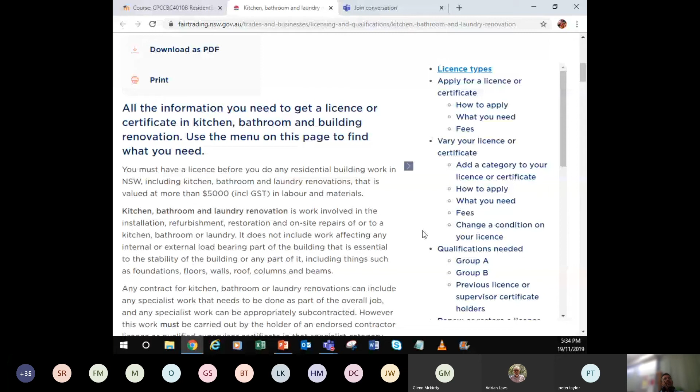I'll quickly read some parts of it, and then I'll show you where you can get your licensing. I think it's like 8 subjects from the Cert 4 if you wanted to. It's not going to matter for you boys and girls because you have all of those quals. But I just want to quickly touch on this before we get into the wet areas. So to get a license or certificate in kitchen, bathroom and building reno, you need to complete a few subjects. Sorry, this screen's just getting hard, getting used to.

It's work involved in the installation, refurbishment, restoration and on-site repairs of or to a kitchen, bathroom or laundry. It does not include work affecting any internal or external load-bearing parts of the building that is essential to the stability of the building or any part of it. That includes your foundations, floors, walls, roof beams, and columns. So really, it's non-structural licensing work to do your bathroom renovation. A lot of wall tilers do it, some plumbers do it - they get their renovation license.

For you guys, you're going to have your Cert 4 complete, so you could get this, but you'll be able to get your builder's license, which you could do the whole lot. Okay?

The licensing types are the same as all categories of licensing - plumbing, building, carpentry. You can get your qualified supervisor certificate, and you can also get your contractor license, or an endorsed contractor license. We've gone through that before, so if you want to go back, have a read up yourself. But that's for every category, okay?

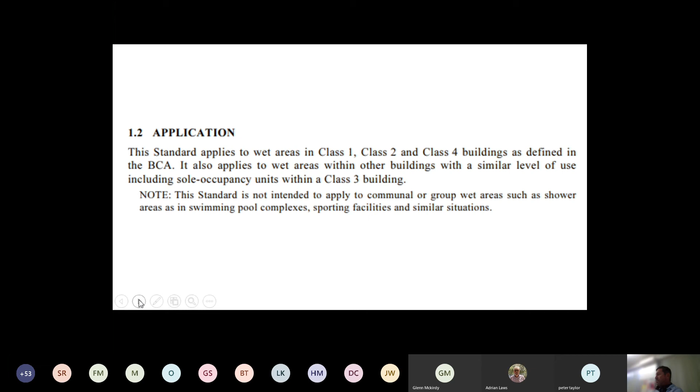I think it's SOUs, which is just like a single unit where someone lives, sole occupancy, like the same for class 2s. Yeah, like a little apartment. All right, I'll move on.

If you go into the definitions, boys listen up, just go into the definitions and look through all of them, but I've highlighted the ones that I think are quite relevant, or maybe harder to understand.

So bond breaker, does everyone understand a bond breaker? I've got some pictures I'll show you in a moment. It's a system that prevents the membrane bonding to the substrate bedding or lining. They have them in the corners. I'll show you a picture in a moment.

Maximum retained water level, has anyone ever heard of that term? The point at which surface water will start to overflow out of the shower. So you got your hob at a certain height, so the maximum retained water level is going to be, say, 100 mil. So your maximum retained water level that doesn't have a hob is only going to be 10 mil or something. So you have to make sure it runs away pretty quickly in comparison to a hob.

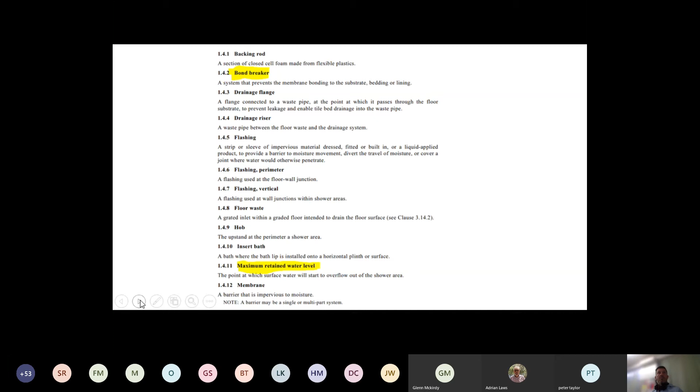There's a few other definitions there. Most of them you should know. You know what a shower screen is, shower tray. I think if anything, maybe the bottom one - do we all understand the difference between a shower area that's enclosed and unenclosed? I'm assuming you guys know that. I'm going to move on.

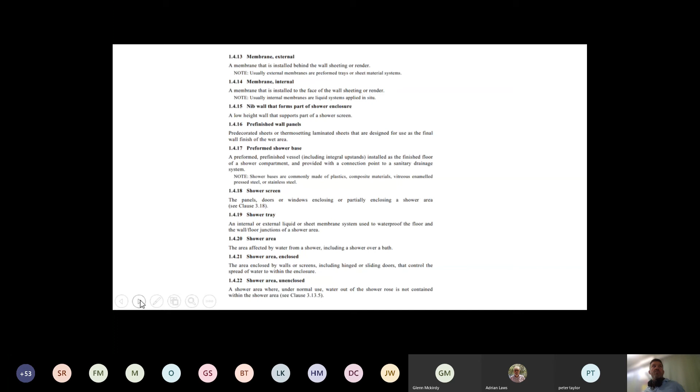Waterproofing, or WP, the property of a material that does not allow - there's water resistant and waterproof, you have to remember that, it's pretty important. So waterproofing is the property of a material that does not allow moisture to penetrate through it when tested in accordance with AS 4858. That's one of the other standards that talks about the materials. We don't need to go into it, but just remember, waterproofing does not allow moisture to penetrate through it.

Because the next one was water resistant, I'll talk about that in a moment. I'll just go back. For the purposes of the standard, the following materials used in waterproofing systems are deemed to be waterproof: stainless steel, copper, flexible waterproof sheet flooring materials, and any membrane that meets the AS 4858 standard. Most of the products you're going to buy are going to say that it meets the requirements of AS 4858.

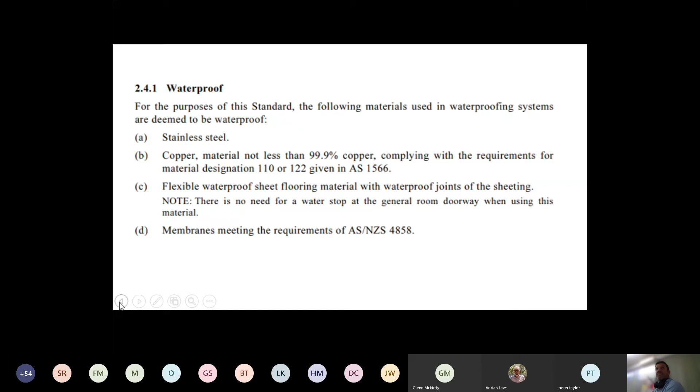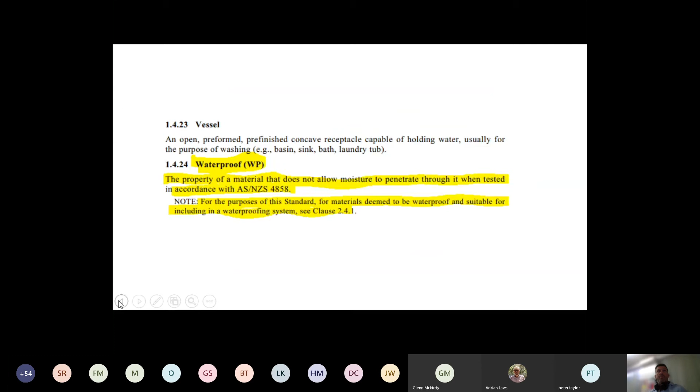So I'll go to the water resistant part first. We said how waterproofing - let me just go back - waterproofing does not allow moisture to penetrate, but water resistant is the property of a system or material that restricts moisture movement and will not degrade under conditions. So it's not going to stop it, but it restricts it. Guys, give me a bit, it's hard for me to do it and talk.

Does that make sense? A waterproofing system is a combination of elements that are required to achieve a waterproof barrier as required by the standard. So that's the whole lot - that includes the substrate. Does anyone know, you guys know what a substrate is? Can someone in the chat box tell me what a substrate is? Membrane, bond breakers, sealants, and finishes. Does anyone know the term substrate?

Can someone in the chat box? Yeah, so Josh is right - it's the material you're working on. So it could be concrete, it could be FC sheet, it could be particle board flooring. So some of those substrates would be water resistant, some might not be. And that determines to what degree you're going to start waterproofing the system or the wet area. Yeah, that's right, Riley.

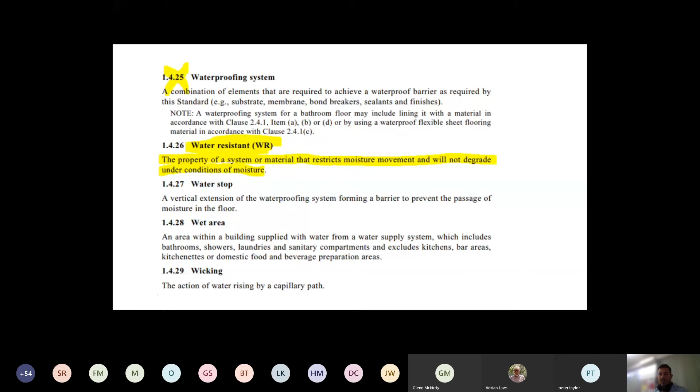I won't go into this in full depth, but water-resistant substrates for walls can include your concrete, cement render, fibre cement, water-resistant plasterboard as per that standard, any masonry. Your floors can include concrete, compressed fibre, fibre cement sheeting, flooring grade particle board sheeting in accordance with those standards, and same with structural plywood in accordance with any of those standards.

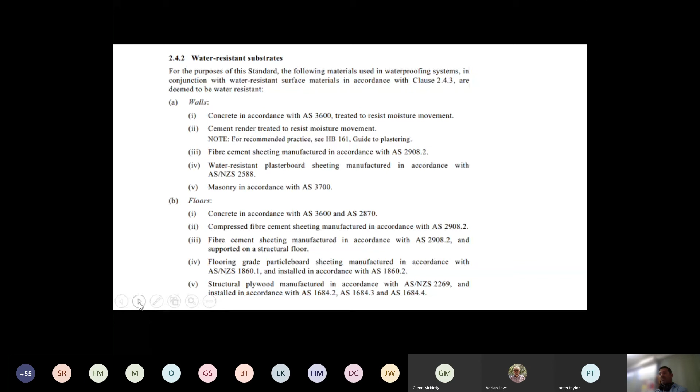Imagine if you get some crappy particle board sheeting that you think's compliant and it's actually not. How do you know? Who's checked? Have you ever checked? You don't check that much, eh? Oh, very rarely. Yeah, so it's all on the builder. Anyway, just be mindful of that.

Righto, so design and installation - waterproofing systems and their installation details shall be waterproof or water resistant as per the code. While I'm going through this, can you go to your NCC, open that up now, and just open up volume 2, and I think it's section 3. I want you to have a look because I'm going to open mine up as well.

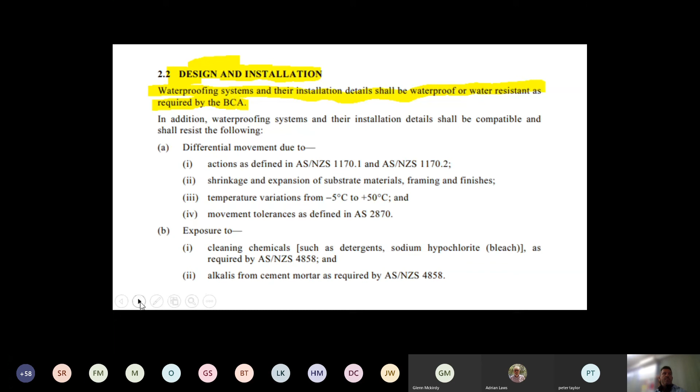All right, so you've got a snapshot, that helps.

Okay, so remember acceptable construction - this is the old-fashioned way of doing it. If you just do it the standard method, you will comply. Table 3.8.1.1, I'm going to put that up in a moment - that's in the Australian standard. We need to make sure building elements in wet areas within a building must be waterproof in accordance with that table and comply with AS 3740.

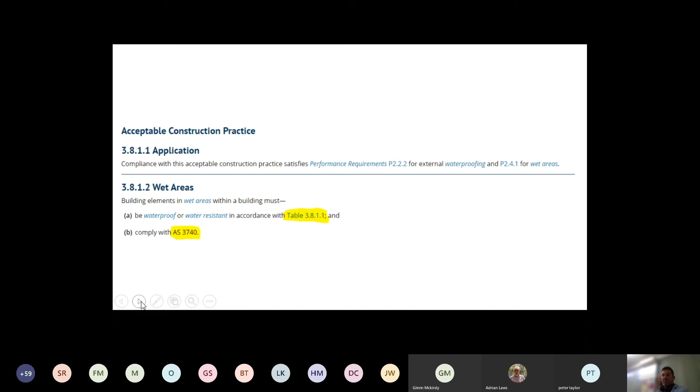I'll put that up later at the end of the night. For those searching, go to part 3.8, health and amenity. Remember the main part of the building codes - don't do 2016, that's the wrong one. Remember section 3, acceptable construction, that's 3 years old.

Does anyone know the falls required in wet areas? Anyone know the falls? 1 to 100. How much is that over a metre? 10 mil over a metre? Sounds good to me. We're required, so let's just think about this.

Falls in floor finishes shall allow all surface water to drain without ponding, except for residual water remaining due to surface tension. Can someone in the chat box or you guys here tell me what residual water means? What's residual water?

Yeah, it's like, that's right - it's like the water left over. So you've got enough fall. Oh, they're high-fiving - Griffith boys have just given themselves a high five. I love it. Look out, we've got some high fives going on here.

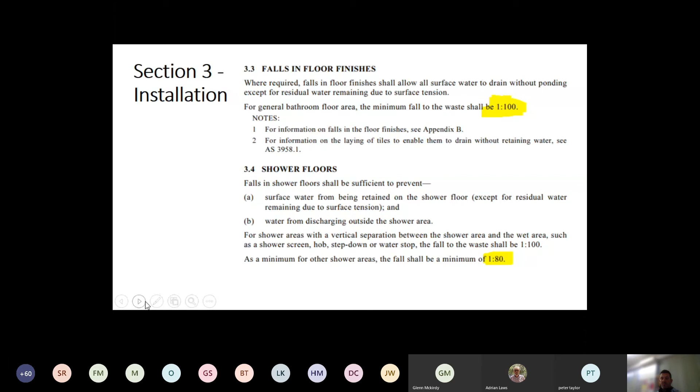12 and a half, I'm pretty sure it's 12 and a half. Tim, you're all over it. All right, you will never forget that. Good work. Make sure you say to your bosses, where's AS 3740?

All right, a couple of other definitions before I get a wriggle on - baths to be recessed into a wall. Did you guys do bathroom as a subject? That's actually a good subject. We don't do it at Wollongong. Has anyone else done it? Any other campuses?

They did it with Bruno here. It's actually a pretty good subject. What you have is, Wagga does it.

That's good. What they do is an integral vertical upstand lip, so it's recessed into a wall along the side of the bath walls to enable a waterproof junction between the bath and the walls. But you can also have baths with a downturn lip.

The downturn lip shall be installed as an insert, as shown in a couple of snapshots to show you.

That's permitted as per the standard, but then you can also do typical bath joints here. So there's more than one way to do it.

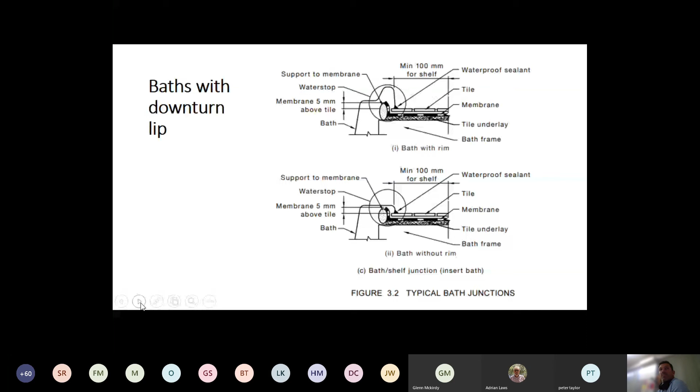I know this is getting pretty fancy, a lot of soap holders. Has anyone noticed that you need to have a fall in the base of the soap holder? It can't be flat, just a slight fall so it doesn't pond. If it ponds, it's actually non-compliant. They can make you rip it out.

Little things like that, as a builder, if there's a mistake and it ponds, you have to come back and fix it. And how much of a punishment is that? Do you know how hard it is? Technically, if you just pull out one tile, that affects the whole membrane, doesn't it? So really the whole thing has to come out, you have to redo it. So be very mindful of that.

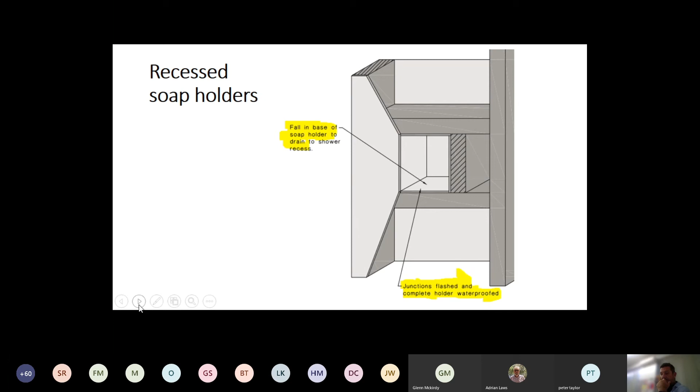I've just taken a snapshot of a typical hobless construction. Some of the shower screen extrusions may not permit the water stop from extending into a rebate, so they've got a channel section that may be needed.

To be installed over the water stop angle in the shower screen, placed on top of the channel. You can see where the floor substrate is, then you've got your membrane, and you've got your angle where the shower screen is, right over the centre.

So what's that, 5mm minimum, it says.

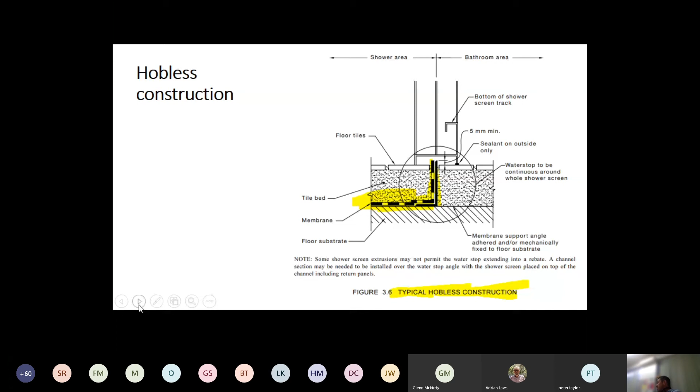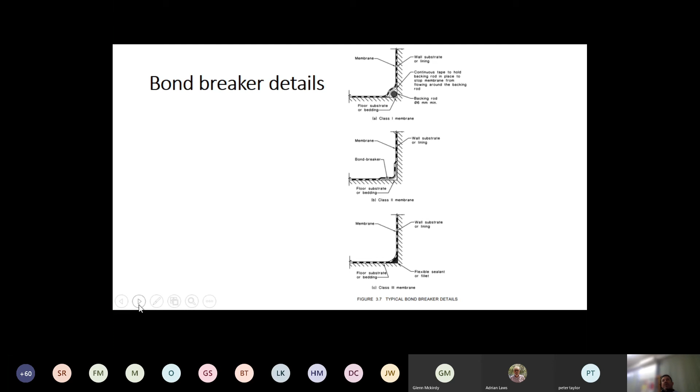Some details of the bond breakers or different types. In the corners there, you can have your flexible sealant or a floor substrate with some membrane, or then you can have the backing rod, that 6mm backing rod. You've seen those?

If you've got the standard open, go to Appendix C, and it's referring to the National Construction Code. They still refer to it as the BCA, but some of those figures, C1 and C4, show it in a bit more depth. A lot of the areas are taken as like 1500mm from the shower connection as an angle where you have to have the waterproofing.

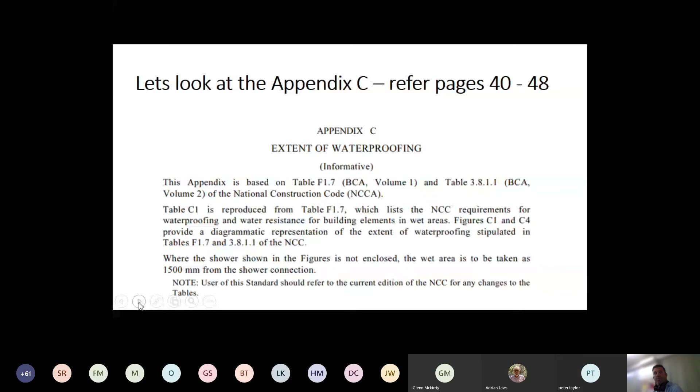Table C1 pretty much is what you'll refer to all the time, whether you need waterproofing or not.

I've got quite a few questions in the quiz. For example, waterproofing requirements with a pre-formed shower base are not applicable for the floors and horizontal surfaces because it's pre-formed.

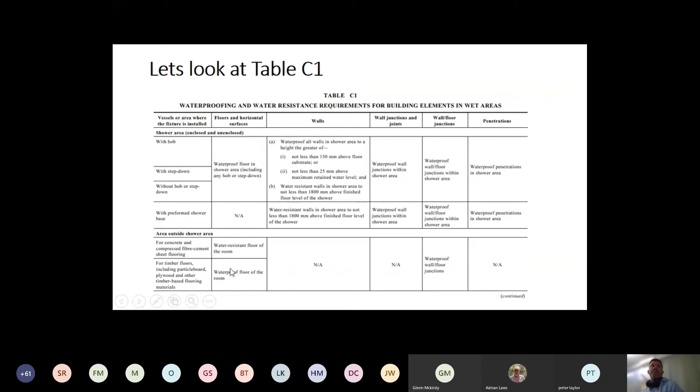For concrete and compressed fibre cement sheet flooring, the area adjacent to the bath needs to have, for the floors and horizontal surfaces, some water resistant floor of the room. Laundries and WCs, water resistant floor of the room. Waterproof the junctions, the wall floor junctions.

Sometimes I've quite often seen builders go over and above what the standard calls for, and I'd probably still stick to that.

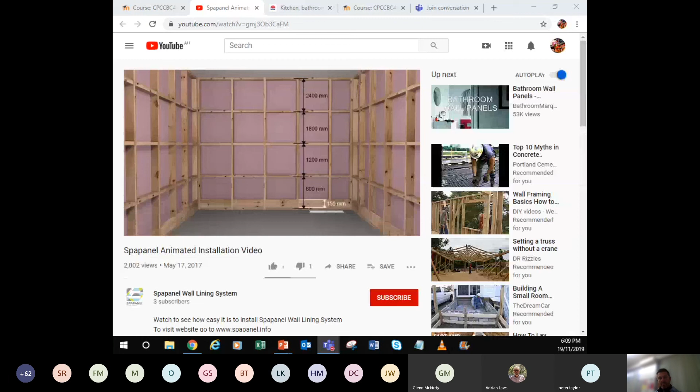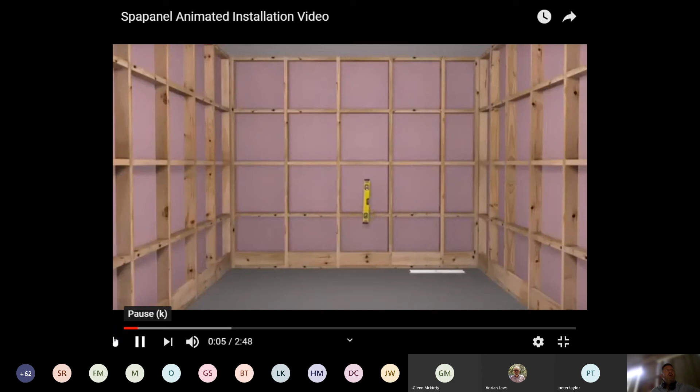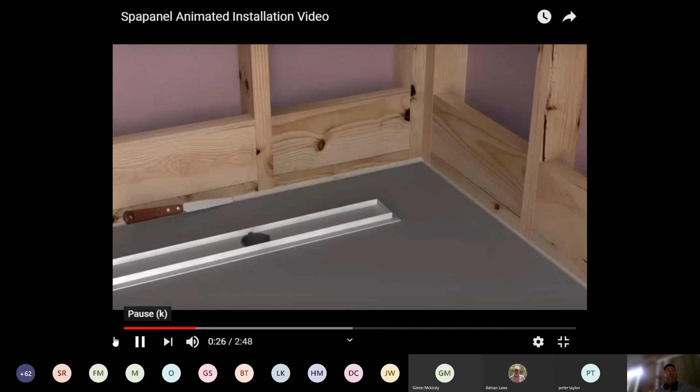Watch this one, guys. This is different, eh? Heaps different, this one. Yeah, it's different, eh?

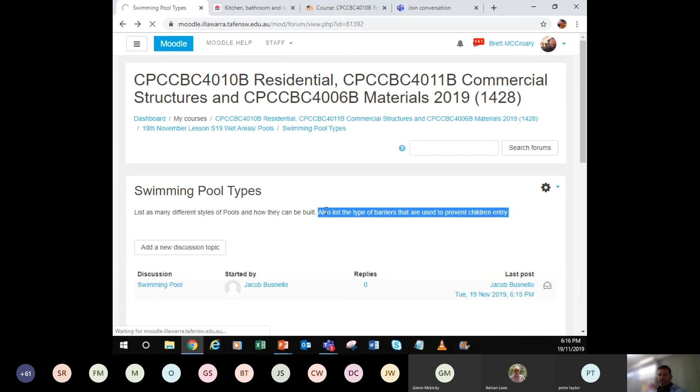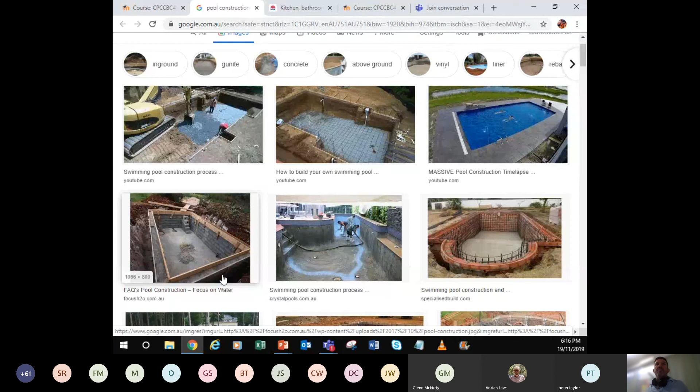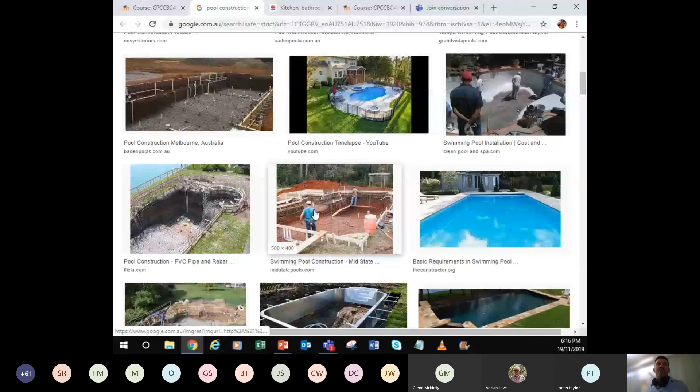What I am going to do is touch on the actual building of swimming pools. I've got types of pool construction: fiberglass, blockwork with a slab, and shotcrete. This is probably the most common and most effective. The fiberglass ones - once you get your builder's license, you'll be qualified to do a pool.

I've got the link here for the licensing. Swimming pool building refers to all work involved in the construction, renovation, alteration, repair, extension, maintenance, decorative or protective treatment of a swimming pool. It includes all other work directly associated with the swimming pool installation, such as landscaping, safety fencing, pool water filtration and heating. Any other work not directly associated with the correct and safe installation and functioning of a swimming pool is excluded.

I saw that there was a qualification you had to get, a cert for swimming pool building, but I'd never even come across that until today, I only just noticed it. But as I said before, with a builder's license you're qualified to do a swimming pool yourself. Licensing are all the same. Just going to open up this next link.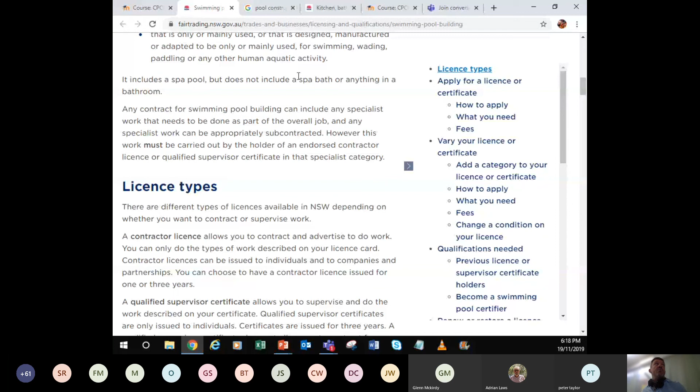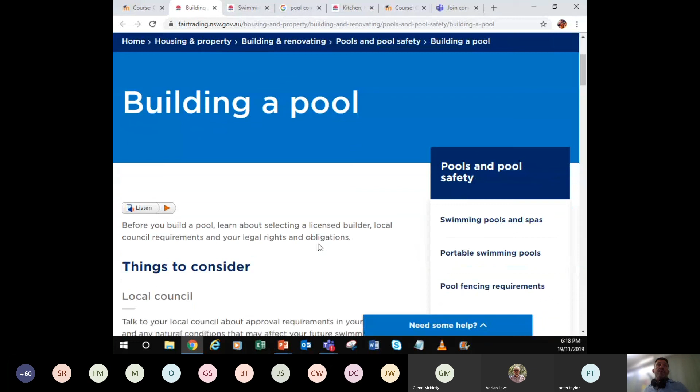I hope you already know most of this. You need to go to your council for approval. You need to get a geotech survey. You need to check for underground cables and anything that needs to go in. Site considerations - your sewers, stormwater drainage systems, and any other utility pipes. Select the appropriate pool for the site, consider maintenance and the right equipment. Approvals, you need some signage during construction, and obviously choosing the right builder - so that's you guys.

Now, we don't go into pool building too much because that's a bit of a specialist trade. But has anyone dealt with swimming pool barriers? Has anyone built a swimming pool barrier? Has anyone had a non-compliance certificate received? Those online, I'm just checking out the guys here at Griffith. Anyone?

Yeah, to swap all the windows. That's Lachlan, yeah? Those online - Lachlan's just telling me the windows were opened up into the fenced area, so it was non-compliant.

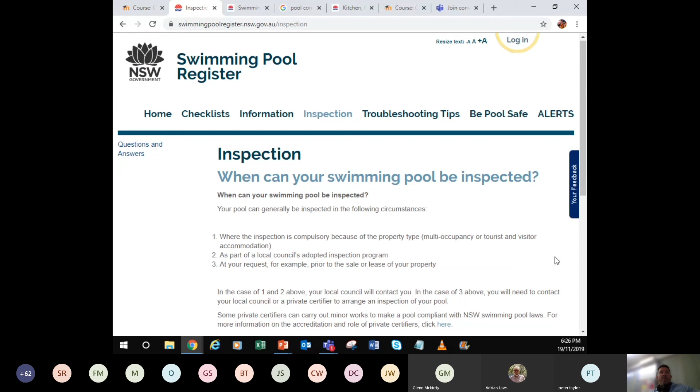All right, so what you do is, I'll give you the links. As an owner, you have to register your pool. I'll go in there, they register the pool, click on it, you'll get a pool inspection. Let me just open this up. And it goes into the depth of the certification and so forth.

What you need to do, in its simplest form, is make sure your handrail doesn't let a 5-year-old kid in. But that also includes your boundary barriers, which is the neighbour's property. And it's supposed to be 1.8. If it's less than 1.8, you've got to redo it.

So what I'm going to do is, you're pretty much going to answer this for me, but can anyone say, I suppose I probably might have told you, how can you comply? Which Australian standard can you refer to? So I don't need that, that's the link. What I do need is this. This is what I want you to look at. This is the most important.

This is 1926, I want you to open this. I'm going to scroll down this. I know the scrolling is not the best, but it's probably just good to get a bit of an overview of it. So 1926 is the Australian standard for swimming pool safety. It's not for building the pool, it's for the barriers. Because if a kid gets in and they drown and you're the builder, you could be held liable, okay.

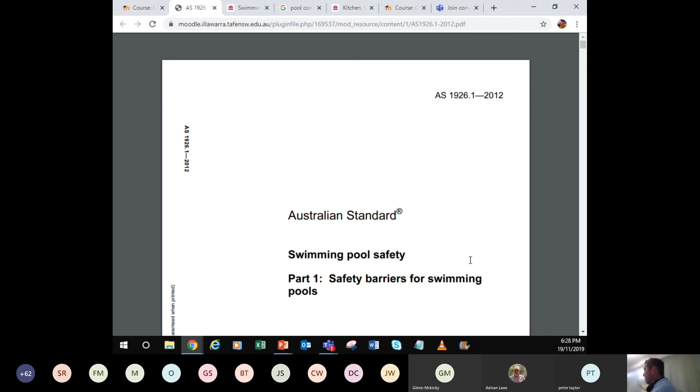So the scope, this standard specifies requirements for the design, construction and performance of barriers that will restrict the access of young children to swimming pools.

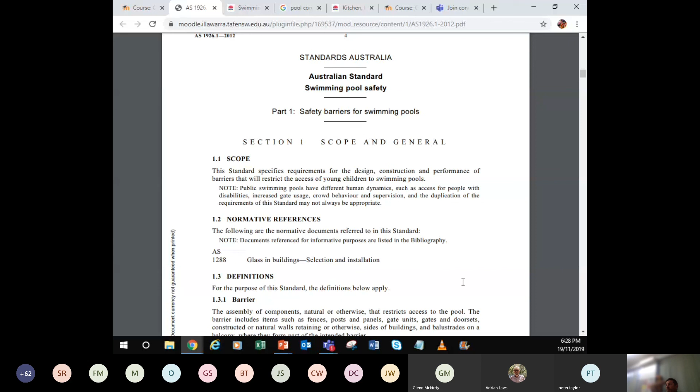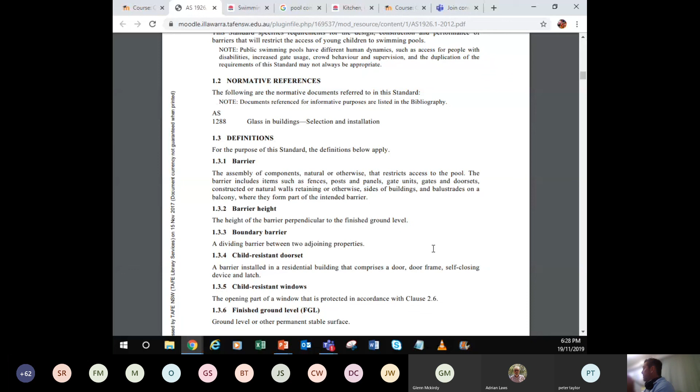It goes into the actual definitions. I'm not going to go into that too much because you guys are going to search it on the quiz. There's a couple of differences. Your barrier height needs to be 1.2m - that's for on the property. You have a boundary barrier, it needs to be 1.8m. So the boundary barrier is the dividing line between you and the neighbours.

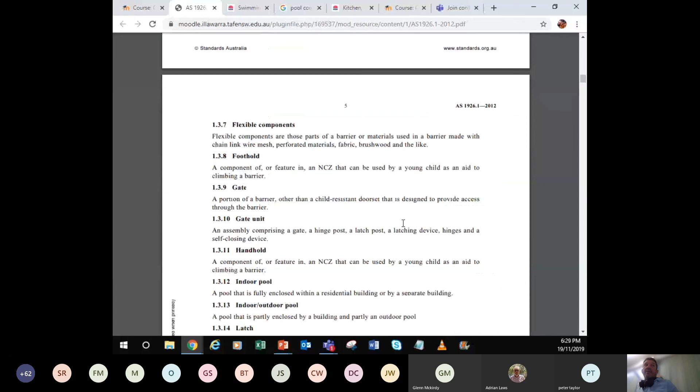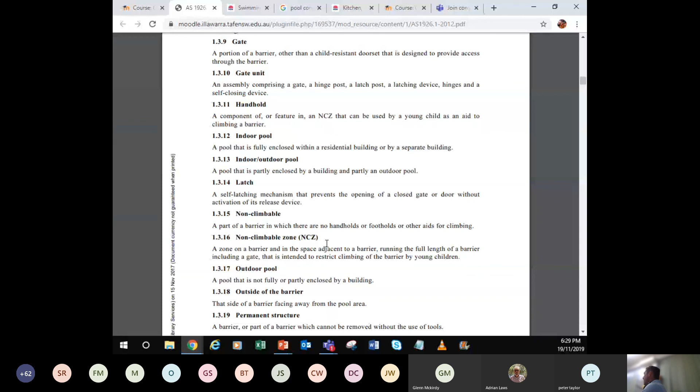There's an acronym, it's called NCZ - non-climbable zone. It's a zone on a barrier and in the space adjacent to a barrier, running the full length of the barrier, including a gate, that is intended to restrict climbing of the barrier by young children. I'll show you in a moment. So you can't build anything in that NCZ - does that make sense? You can't even have a tree, you can't have a chair there. You're not allowed to.

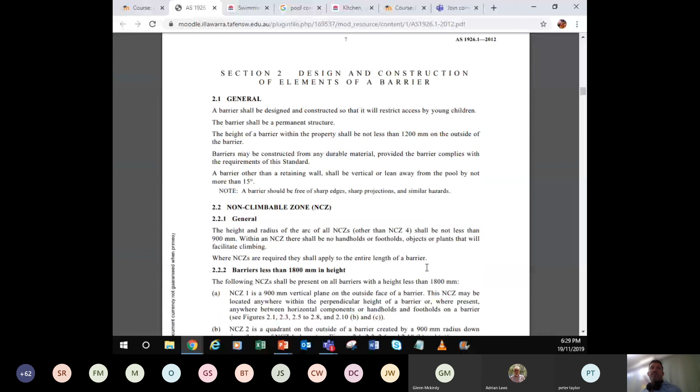Known as a non-climbable zone. I can waffle on for ages, but the best thing to do is show you the picture - maybe I'll do the 3D one. Can you see that? So anything in that area is not permitted to be built or climbable.

If it's not climbable, because sometimes it gets subjective, it'll be all right. For example, see that 900mm arc? The NCZ2 and the NCZ3s, that's that big arc. So what they say is a kid under the age of 5, if there's something within that zone, they can climb up, jump in, get in the pool and drown. The NCZ1, that's actually the actual barrier itself - they reckon you can't have anywhere where you can grab onto stuff.

Now you might say, see this rail, it's probably hard to see. That rail is permitted as long as it's bigger than 900mm. What they say is if it's less than 900mm, a kid can step on it. But if it's 900mm or more, then it's okay.

Now, if you were ever doing a job, the DA, whoever's designed it, the architect, they should have this sorted. But a lot of times, a lot of jobs, it actually hasn't. And what happens is the architect goes, oh shit, we didn't know, we made a mistake. What they do is they go to their drawings and press delete - do you know how easy that is? Does everyone know the difference between a tradesman fixing up a mistake and an architect? An architect can press delete and fix up his drawings. A builder or carpenter, if he hangs a door the wrong way around, that costs him a day's work, doesn't it? And he doesn't get paid for it.

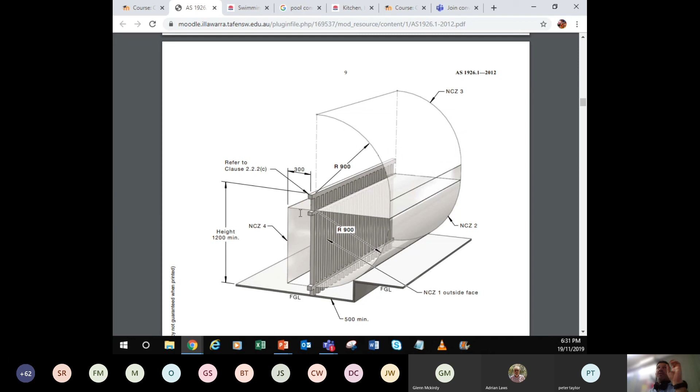All right, I'll just show you the pictures. Josh just made a comment. Can you notice, and I also thought this as well, the outside says it may be climbable and you have an NCZ5, so you can't have anything within this area that could be climbable.

Now, why is there like this, the rails there that hold the fence together - why would you think that's permitted? The reason is because the evidence they've got is that if a kid's on the outside and they get a ladder or they get up, they could climb up those rails, look down, see that 900mm, and they'll go it's too far to jump, so they don't jump. That's why they say they would prefer the rails on the outside. Every time you've done a job, every builder has made this mistake - they put the rails on the inside because they think it stops the kids from climbing up, but it has to be the other side.

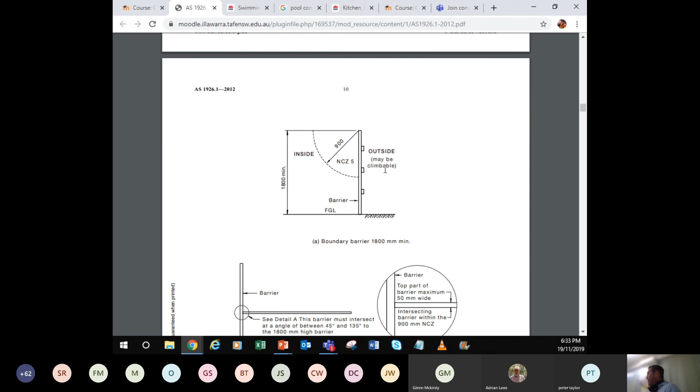So remember that. Josh has just made a good comment - so it's less likely for a kid to jump down 1800mm. Does that make sense?

Now if you have an instance where there's other little bits and pieces, this is getting into the fine detail which I won't have enough time to show you. This is something you'll only really take in once you start doing it - like I know it well, but I've even started to forget stuff because I haven't done it for a while. But grab this standard and keep it with your package - the little packages have been collating.

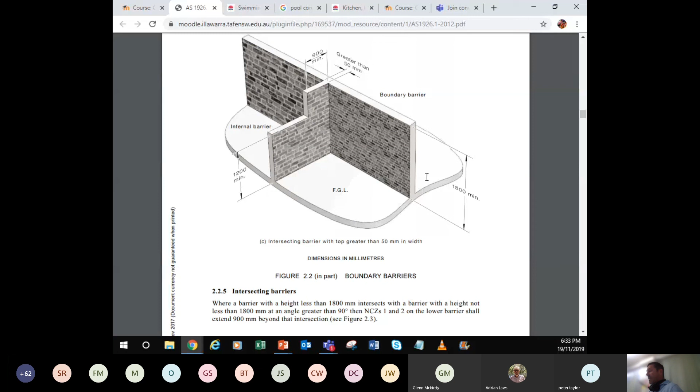I'll talk about the gates in a minute, but this is an issue that a lot of architects and tradesmen, builders don't know. Where you have an indentation in a wall or a projection, if it's more than 10 mil, that is considered climbable, so that would be non-compliant in the swimming pool area or going into the non-climbable zone.

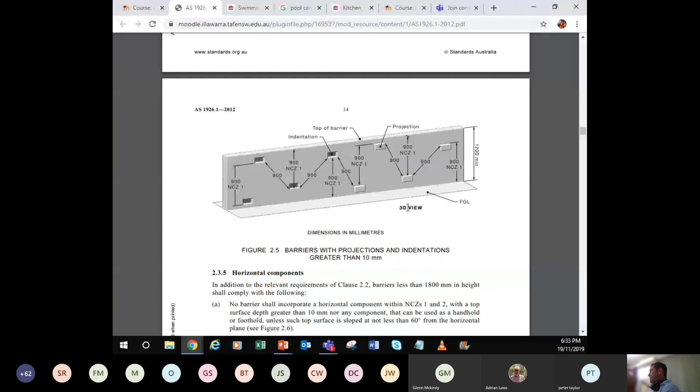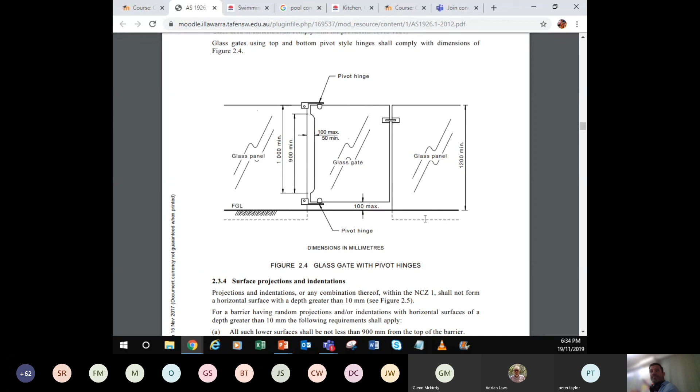There's another detail, can you see? They call it non-climbable, see detail A? If you have that and can't remove it, and it's inside the non-climbable zone, you can get a piece of timber or a chamfer piece. If it's 60 degrees minimum, then that's compliant because they say the kid can't stand on it. That's what they think, well, that's what they say. So you're allowed to do that.

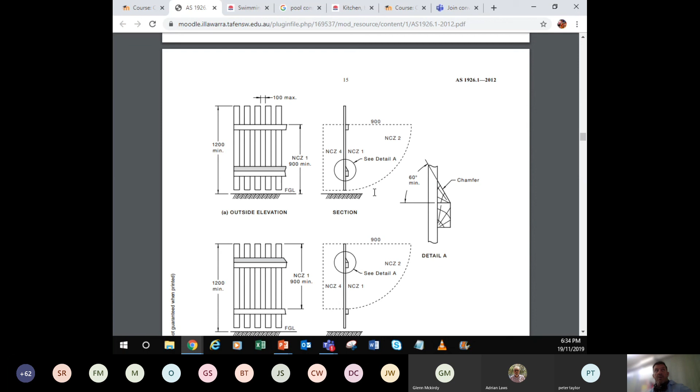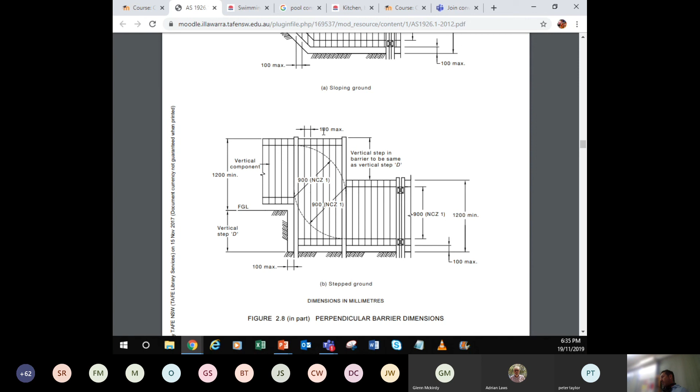1200 mil, 900 mil minimum for where the rails are, 100 mil maximum opening. Does anyone know the sphere for your stairs? 125, yeah, but for pools it's 100 mil maximum. The actual pool fences are Australian standard manufactured, and you can squash the bars in between the 900 mil space. Some, like the Bunnings ones, you can squash them that much and still get a 100 mil sphere through. They reckon a kid can get his head through. I don't know why it's like that for swimming pools and not normal stairs, 125, I don't know, but that's what it says. Just work to that. I always find that one interesting.

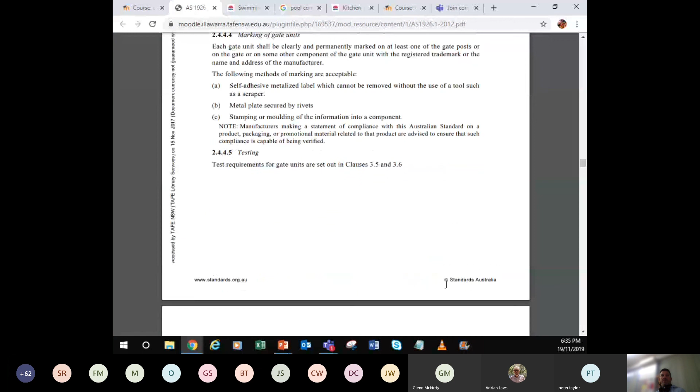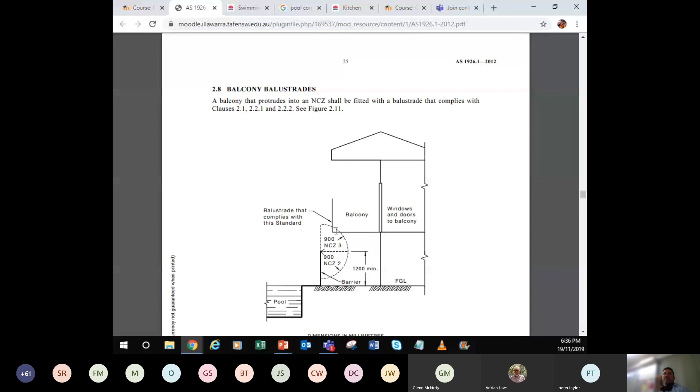Some of the other stuff is in real detail, in depth, about where it can be climbable and where it can't. There's nothing else that really jumps out at me. The rest of it you'll go into a lot more depth, but we've got some quizzes up. Maybe the NCZ3 clashes with that balcony, so the balustrade complies with that standard.

And then it goes into loading requirements, so I'm going to leave that as is. Are there any questions with that? Does everyone understand where I'm going? I'll just have a look.

Dan, Bunnings, sill, boundary fence and pool fence. So Daniel's all over that. There are two different types of fences, you need to make sure Bunnings supply the correct boundary fence material rather than a pool fence. For an above ground pool, there's a section I'll look at after I open everything up, Kamal. There is a section for above ground pools and you still need to have a fence. They used to say that a 1.2 above ground pool fence was the fence, but not anymore, you still need to have a fence around it.

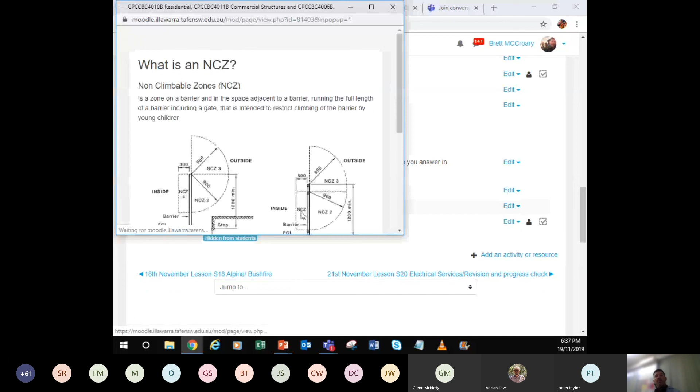I'm going to open up the picture of the NCZs, which you're probably familiar with. From that, are there any questions? Was that a clap? Did I just get a clap? All right, has anyone got anything to say online?